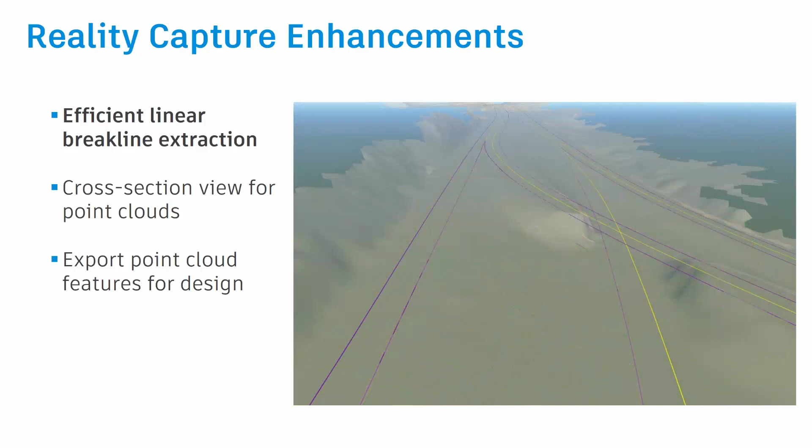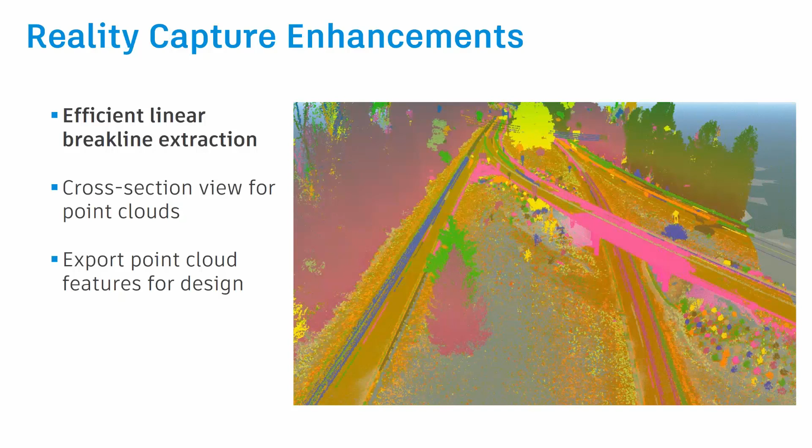Now the user can bring in point cloud data and extract linear strings, and the point cloud can be any type - static, mobile, or even high density airborne and drone data. You can bring in those point clouds and extract them. And when we talk about linear strings, design, and accuracy, we cannot skip the cross section or section view of the point cloud data, so we added those capabilities as well. And of course, once you create them, there has to be a better way to export or take it to Civil 3D to complete your design process, so we added that export option as well.

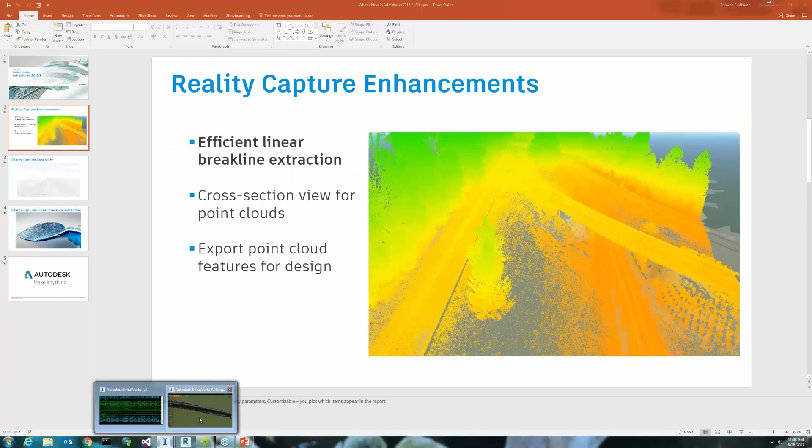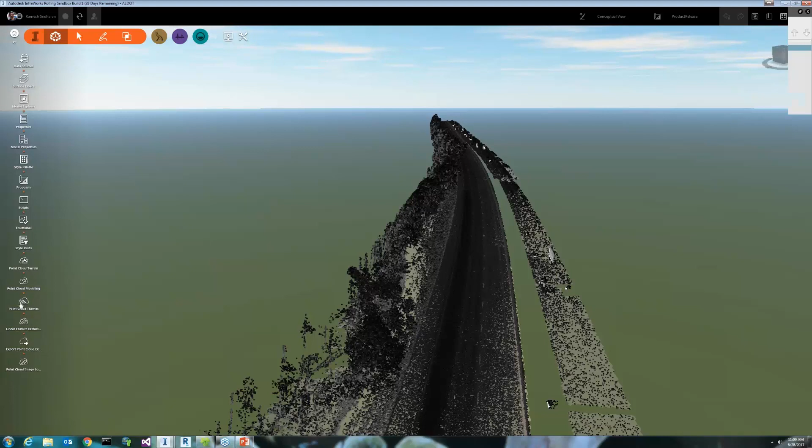Let me jump into the product real quick to show you the tools. This is typical mobile LiDAR data - not too dense, but dense enough to see the point cloud. I picked this specifically because some of the features are not that visible to the human eye, but the point cloud themes tool we already have does a good job bringing them out. If I just switch it on, you can actually see the paint stripes, the edge of pavement - everything was classified in this particular case and kept as very important features right there.

Now the extraction of linear features, we made it really simple. There's a button called linear feature extraction - you click that and there's two options. One is the good old manual stuff, click and double click to create a 3D polyline, but I want to show you the automatic. You click automatic and you have the ability to choose different line styles or what feature you're trying to extract. In this case, I'm going to extract, let's say, edge of pavement. Click edge of pavement, OK, and tell the software what you're trying to extract - in this case, this is the line I want to see.

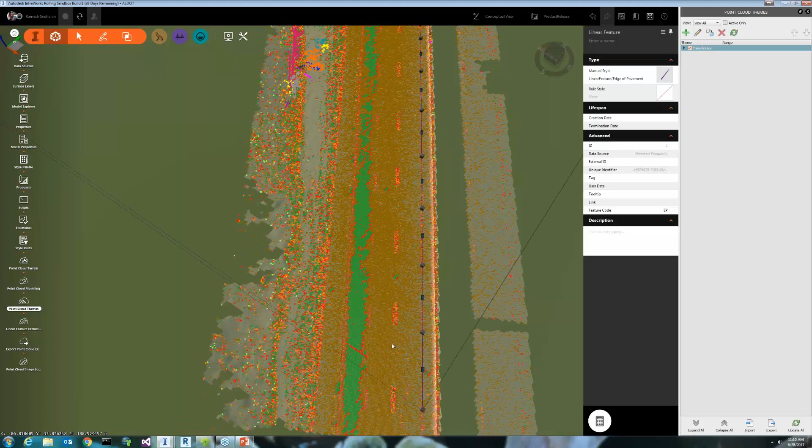The software just gets the information of the feature code in the form of line style right here, and also what line you're trying to extract. Then it completes your thought process - it basically parses the whole point cloud data and identifies all the points that matter for this line, and creates a 3D polyline. Before I zoom out and show you, let me create one more. Click linear features, same thing, automatic, and in this case I'm going to choose quick select - the paint stripe, and this and this. So basically it just gets basic information from the user, and then the software does the heavy lifting to get the 3D linear strings right here.

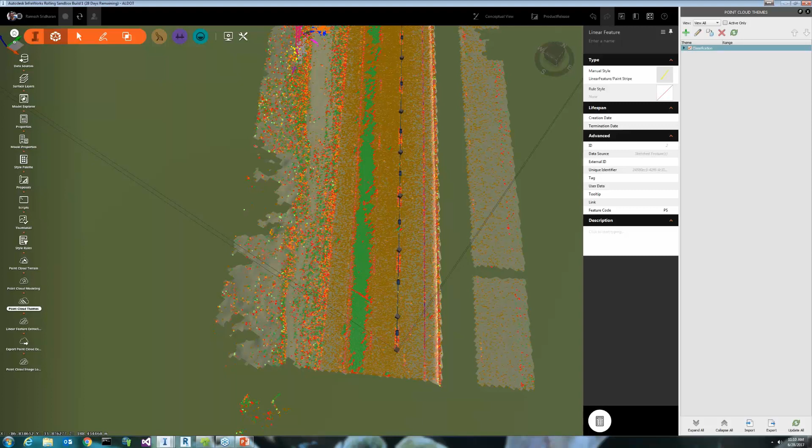The vertex clicks you're making - it's better to be as accurate as possible, but if you're a little bit off, you don't have to worry about it. The software does most of the job getting it good. Let me zoom out - you can see it's relatively big data. Let me zoom out even further. The software did a good job creating a 3D polyline. When I zoom in all the way on the other end, you can actually see this is the paint stripe, and this is the edge of pavement line we created as a 3D line. So the software makes extraction much easier.

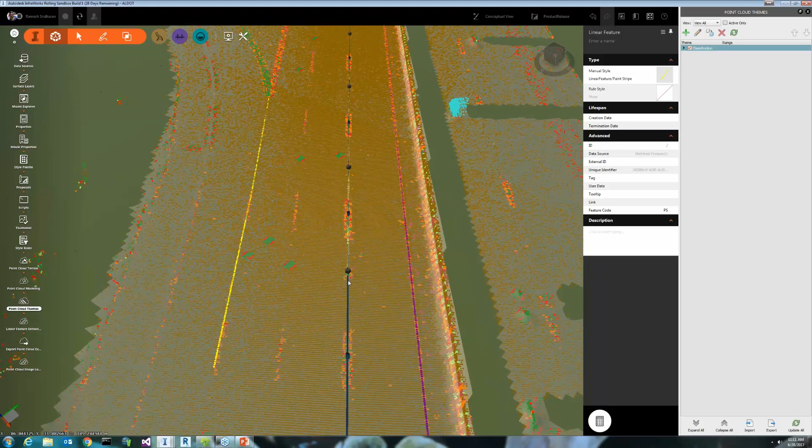Just to show you the manual part - very simple, you can just click, and with the usual double click you can now create the 3D polylines also. We also added some basic line editing functionalities, like for example, if this is the line and I want to split them, you can just click and split.

Now the software makes it two different lines, and you may change your decision and want to merge them. You can just bring it together, and now it makes it one solid line. So we added splitting, removing vertex, and adding a vertex, all those capabilities to make sure you can create a good 3D polyline from the point cloud data.

Once you have that, the user will want to check the lines extracted in the section view, but most importantly, extract the break lines. Let me dive in somewhere like the top and bottom of the curb. I'm going to select a line for an alignment, right click, and say show cross section view. Now the software jumps into the section view.

A lot of options available. You can exaggerate the section view any way you want. There are point cloud themes available to suit the user's need and how you want to see it. There are options for how much of a section you want it to jump, the thickness and the width to show, all that good stuff.

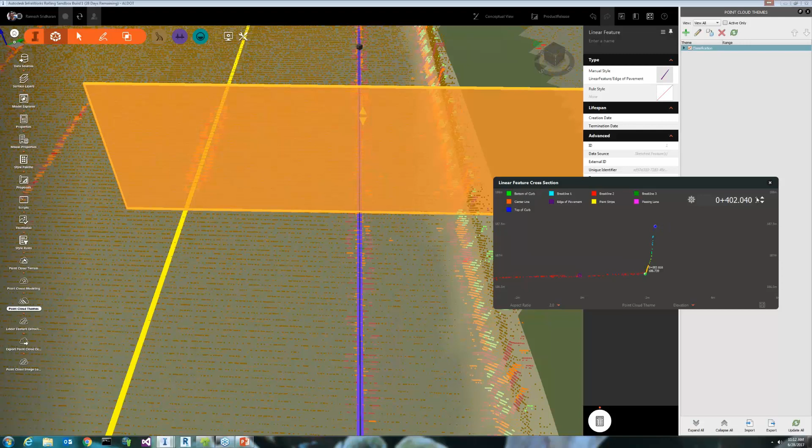So here, let's try to extract the top of the barrier and the bottom. Just click them, now you got the vertex. I go every 5 meters in this case, and now I can extract a 3D polyline of the top and bottom of the barrier. And it's real-time feedback.

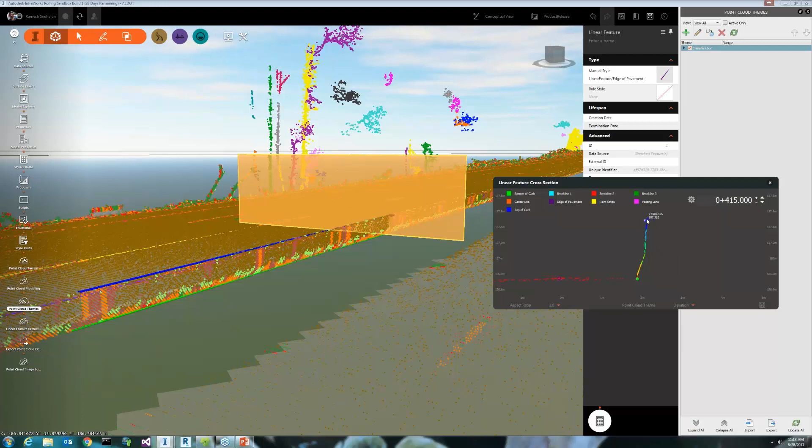You can see the canvas keeps moving and the line keeps updating, and updating the vertex is really simple. Just click and drag. You can mouse wheel zoom in to see exactly where you want to position it to make sure everything you extract is as accurate as possible. The software does a good job maintaining the view irrespective of how the point cloud might go up and down depending on the road elevation changes, easing the extraction process.

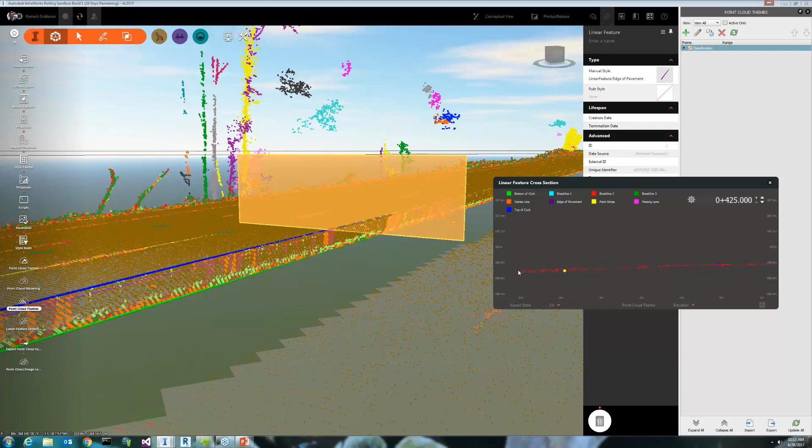Same thing when doing this, if you want to edit some other vertex, like this one here, just click and drag and the software creates the edited line polyline. So cross-section makes the QA/QC job of extracted line work automated, and also lets the user extract additional lines as needed, making sure accurate line extraction comes into the picture. This solves most of the user's problem.

Now you can extract the break lines, take it to Civil 3D, interpolate them, and create a 3D surface. There goes your very good 3D design with Civil 3D. You can get the job done.

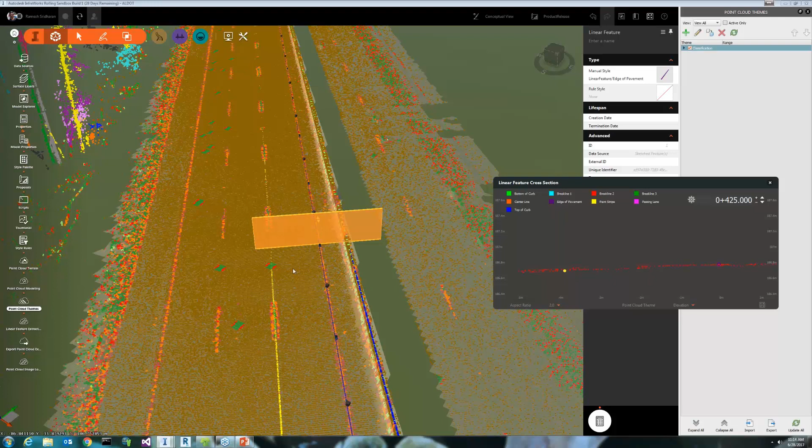We want to add a bit more functionality, like augmenting the break lines with additional details in case the user wants to. One way of doing that is we added a tool called transverse lines. For example, now we have just a break line. Imagine having a horizontal or perpendicular line every so often that gives you more surface details if you want to use. That's exactly what this does.

Let me close this. Come here, choose any alignment, and generate transverse line. There are simple but effective options available for how often you want it and how you want to drape it to the point cloud, all that stuff. But the bottom line is when you press OK, the software creates a transverse line as a 3D polyline for the whole corridor or alignment. That can be exported also, I'll come to that in a second.

So now you're not only extracting the break lines, you can augment that with more details like this. Let me switch off the point cloud so you can take a look at the transverse line. It's for the complete corridor, obviously, and that's one way of augmenting your surface.

The other way is we added the export option. When I click here, the first option is ground grid points only. For those who use the point cloud terrain functionality, which we've had in the product for quite some time, this classifies the point cloud data and extracts a bare earth terrain.

Now you can export them - you had the export option even before, but now I made it simpler, extracting the ground grid points as a separate entity. And of course the linear features, you can extract them with the feature codes and all the attributes available here, and the transverse line as a separate option, so users can choose to use it or not depending upon the purpose.

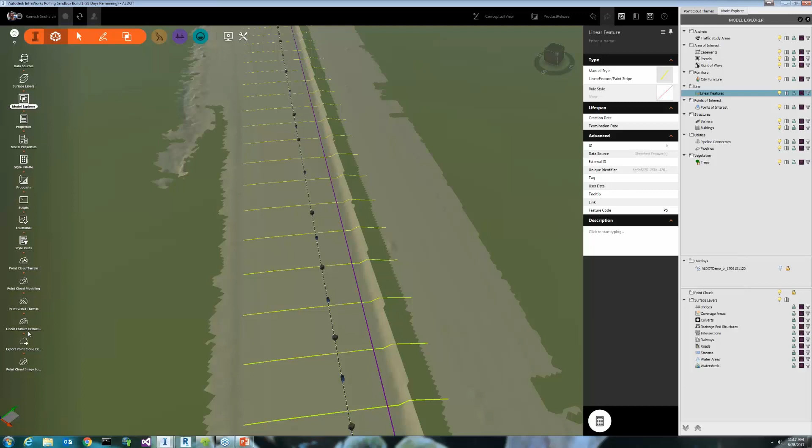Absolutely. So there are some automated options available. Let me just switch on the point cloud data. If I say automatic, you can choose top of curb or bottom of curb, because it's specifically designed to look for the top kind of feature and bottom kind of feature. But as always, you can go into the cross-section mode and extract top, back, and everything of the walls also. Very easy.

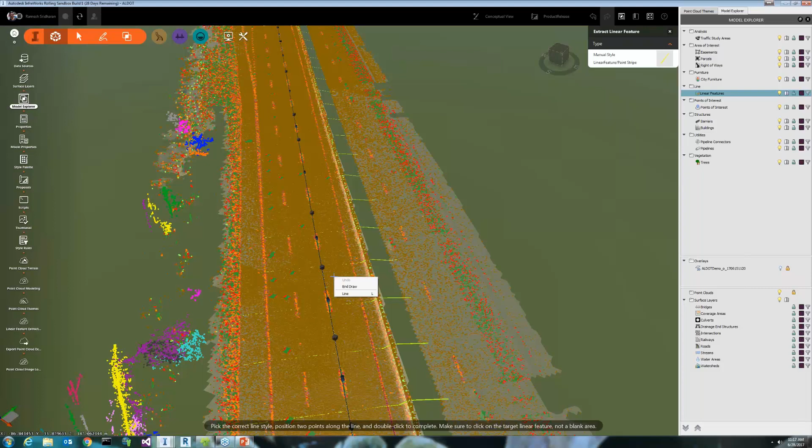Awesome. Another question that came in was just asking about the accuracy of the extracted features. Do you know the type of location accuracy for the features, and if there are any limiting factors?

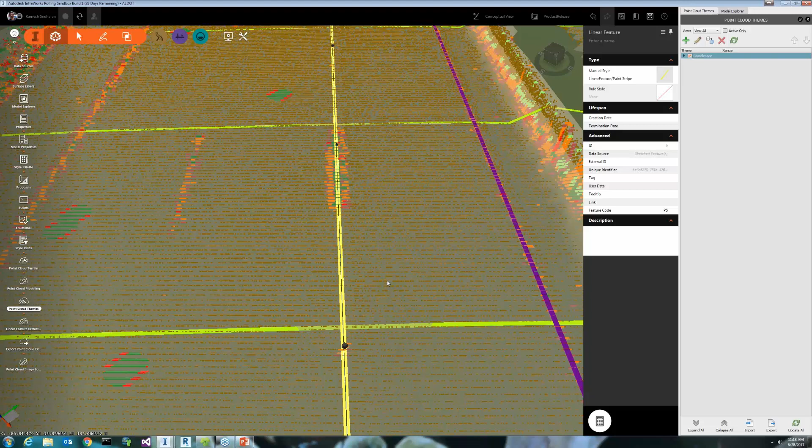Definitely. So the automated algorithm tries to put it exactly in the center. You can see here, I can change the different theme—there you go, not that bad. It's a little odd to see, but you can see that's a paint stripe where it's supposed to be, and the lines are put exactly in the center as much as the point cloud is available. So it makes sure the positional as well as the elevation accuracy is as close as possible. And when it comes to cross-section, it actually shows everything to the user, so the user can guide the vertex where it wants to be to make it more accurate. Either way, you will get accurate quality lines out of the product.

So another question: when you're working in the section editor for feature extraction, is there any type of automation for the bottom and top of the line work, or is this solely a manual process?

We do, actually. So we added some capabilities we call vertex prediction. We had some basic functionality where when you go from one section to another, the software tries to pick the best possible vertex for you. But we plan to make it better and better. It's automation where users don't have to edit so much in the cross-section view, but come across as just a QA/QC person to make sure it is accurate. So there is some automation going on in cross-section also.

Awesome. Okay, I'm going to ask you two more quick questions, and then we will move on to some other sections. One question is, will we get the option to bring in raw LAS files?

That is in the pipeline, actually. Right now we are using the RCS file that comes through Recap. We had some requests from users on opening the LAS file also. That's in our pipeline.

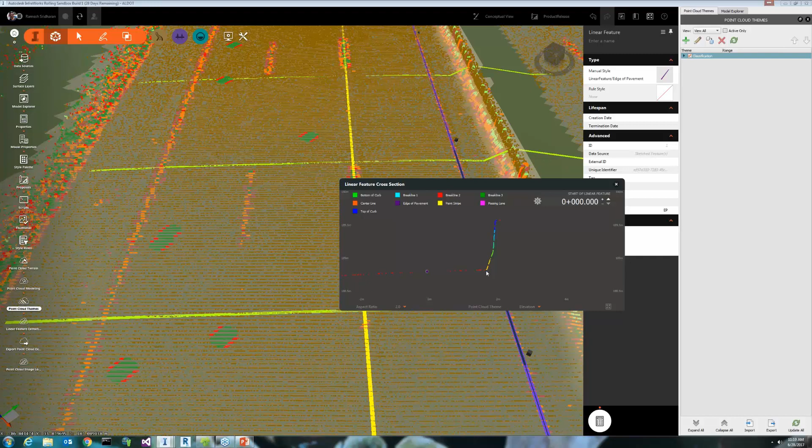Great. Okay, another good question: does break line generation depend on point cloud identification? Can it generate break lines if the point cloud has no identification? When you mean identification, I'm not sure if they mean the intensity values in the data or the classification. I can answer both.

You have to run terrain generation right now to use the linear feature, but terrain generation is an automated process, so you don't have to do much. When it comes to intensity markings, the automation does look for them, so it needs some information, especially for paint stripes and edges of pavement. But for the top and bottom of curbs on cross sections, it doesn't expect anything except XYZ values. So even without markings or indication, you can still use the cross-section viewer to extract what you want.

Okay, final question, to clarify about a previous question on accuracy. Are there any limitations to importing point clouds covering a large area? And does every point come in at the exact location it was collected?

Yes, it will. As far as the point cloud is concerned, we open through an RCS file, and everything will come exactly where it is. This extraction result assumes the point cloud is registered with the control points and things like that—we don't register it ourselves. So every line you're extracting will be as accurate as your point cloud data.

Awesome, great. Thanks Ramesh, we got through all those questions.

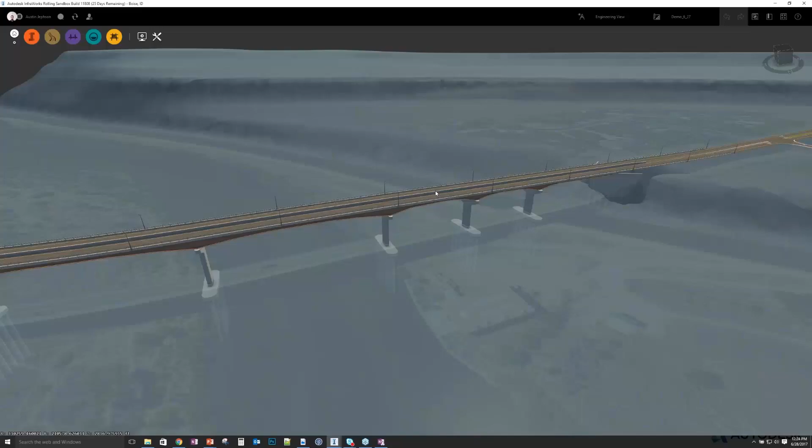Without further ado, I'll go ahead and show you everything in InfraWorks. So here I've got my InfraWorks model—hopefully the lag isn't too bad, but I'll try to move a little slow. First we'll take a look at the 3D dimensions. If I zoom out a little bit and select this bridge, you can see off the bat that you've got an annotation for the start and end stations, as well as one dimension showing the overall length of the bridge.

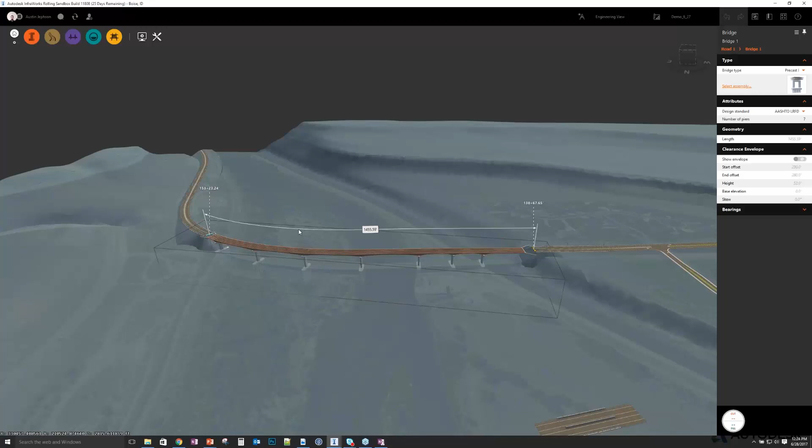If I zoom in, you'll start to see other dimensions appear. With the bridge selected, we show the overall length, start and end station, and then the distance between each pier, so each of the span lengths. This is measured from the center point of the pier to the center point of the adjacent piers.

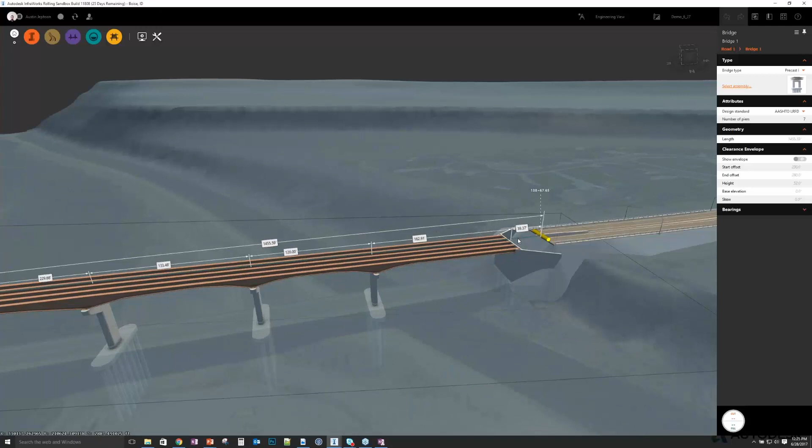In this example, I've got the abutment offset a little bit from the end of the bridge, so you've got another dimension that shows that abutment offset. Now, so that's with the bridge selected. As you select the other objects of your bridge, all of the different components, you'll see a different set of dimensions that are being shown.

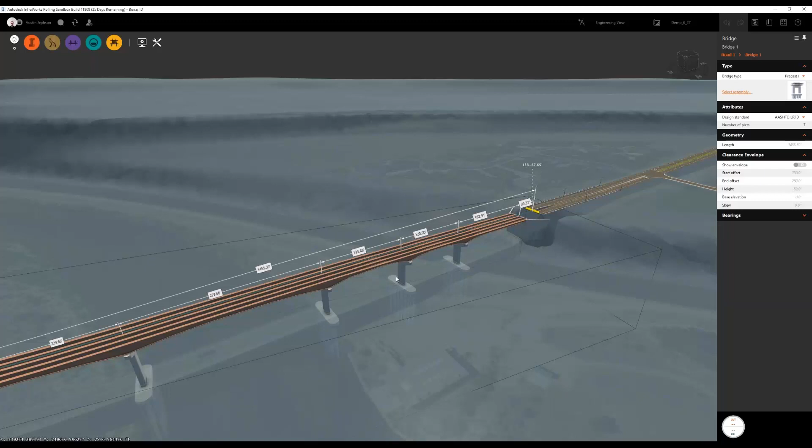Looks good, okay great. So as you select other objects, you'll see a different set of those layout dimensions. Here I'll click on the pier, and you can see that when the pier is selected, you see the pier height as well as the distance to the next pier, distance to the previous pier, and the distance to the start and end station of the bridge.

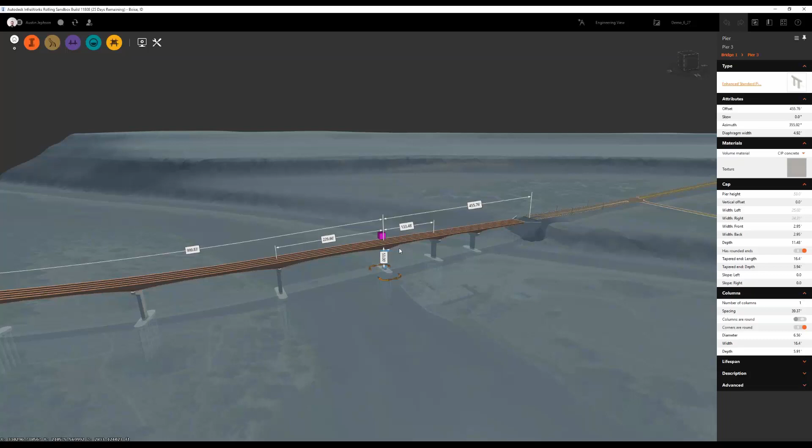Then if I zoom in a little bit and select a girder group, here you can just see for girder group we only show the length of the girder group at the center point of the alignment. Most of the other dimensions are more girder specific.

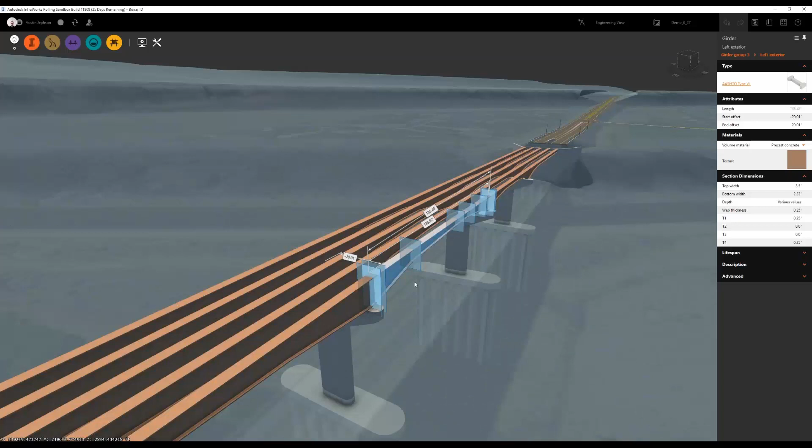So then I'll select a single girder, and here you can see a couple more dimensions. First, from top view, we have distance to the center point of the alignment. Then from side view there's a couple others: one dimension that is the overall length of the girder from start to end, and then another that shows you the distance between the bearings, the center point of the bearings.

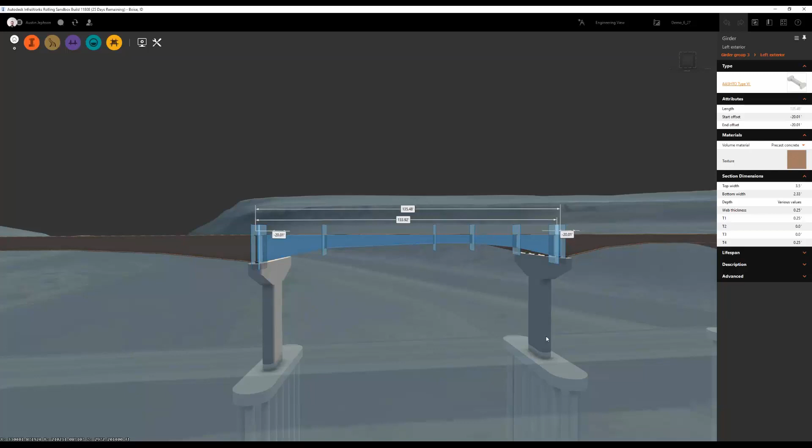In this case, on the left side there's only one bearing, so it's reaching all the way to the end of the girder. On the right side, it's not a continuous girder, so there's two bearings, and you can see the difference in those dimensions.

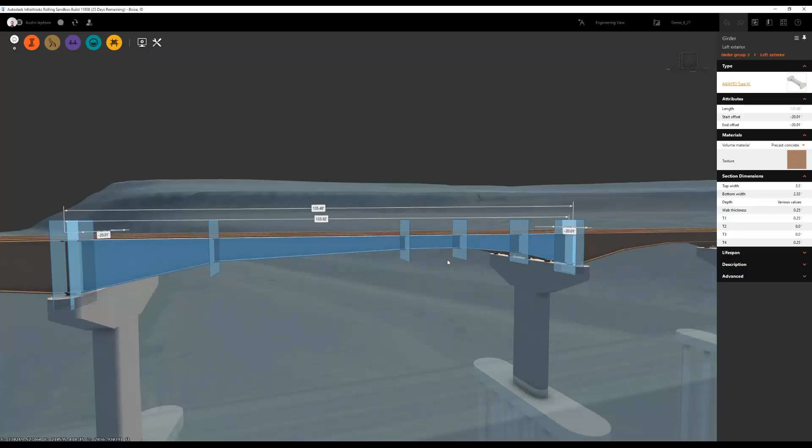So I'll go one more level, and then we can discuss a couple more things. I'm just going to use this example. If I select one of the cross-section slices, the girders on this bridge are variable depth steel girders. I'm using AASHTO type 6 girders for this, and I've changed the section dimensions so that it looks like an I-beam girder and has the right dimensions. Then I've changed the volume, material, and texture so it shows up in my material calculations as steel.

Then to create the variable depth, I've placed a series of cross-sections along the girder and adjusted the parametric attributes of it. Now when I click on one of those sections, you can see there's now these in-canvas dimensions in addition to the mini toolbar. So this is kind of hinting at the next stage for these in-canvas dimensions.

The mini toolbar allows you to change all of these values, all these placement dimensions, and add in new ones and delete them and so on. But eventually, and there's another team working on this, kind of creating the widgets and all those things, you'll be able to just interact with these dimensions directly. So you click on this 40 and change it to 50, and you'll see that cross-section slice update to match. That's kind of the next stage for making all of these in-canvas 3D dimensions interactive, and that'll open a lot of doors for how you interact with your InfraWorks models.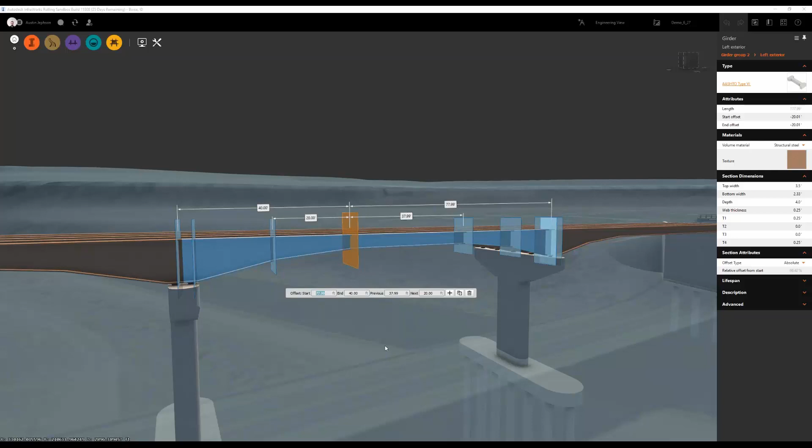So I think that's it for the 3D dimensions. We'll continue to expand the way that we use them over time and add in more. And so now let's take a quick look at the decorations. Here I just created this little snippet of road just to make it easier for us to look at.

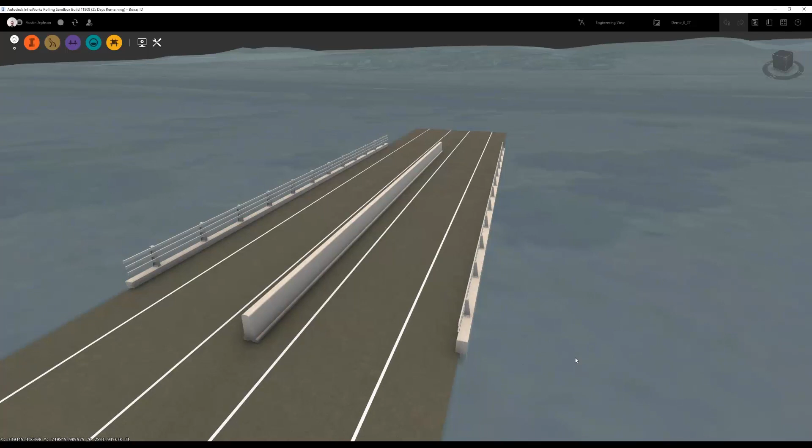You can see I've got some decoration along it. On the left side, I've got this little parapet concrete piece. This is actually an assembly from that bridge we were just looking at. I just created an assembly and then applied it to this road. So these parapets kind of extend below the ground.

On the left side, you've got a box beam guardrail with 3 rails, and on the right side, you've got a box beam guardrail with only 2. You can see this parapet on the right side is a little taller than the one on the left, and then we've got this barrier in the middle. So these are all the new parametric

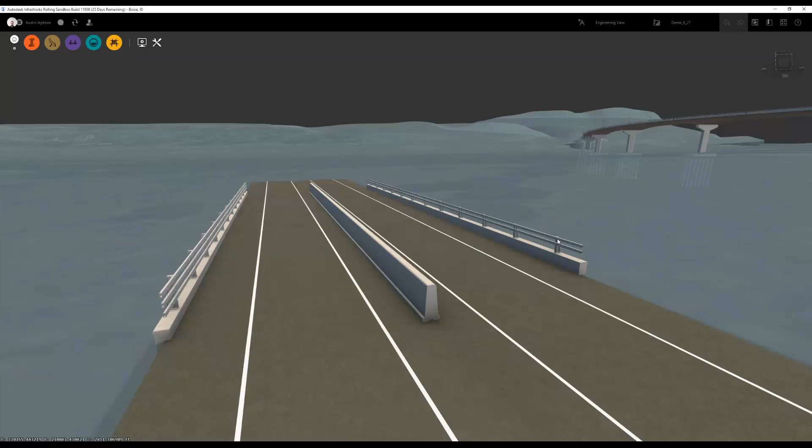decorations that we've added, and both of these guardrails are actually the same Inventor model. So if I select it, I can see that in addition to the normal things you would see with decorations, so this geometry section, you've also got a rail, post, and plate panel, which are all of the parametric dimensions that you can actually flex in the model, and these are all defined by that Inventor model.

So I'm just going to make some quick edits so that we can look at it. I'll just make this have 3 rails. I'm going to change the spacing to 6 inches between each of those rails. Then I'll change the thickness so it's a little bit wider. I'll make it 6 inches as well. And then I'll change the height of this post to, say, 3.2. And then I hit enter.

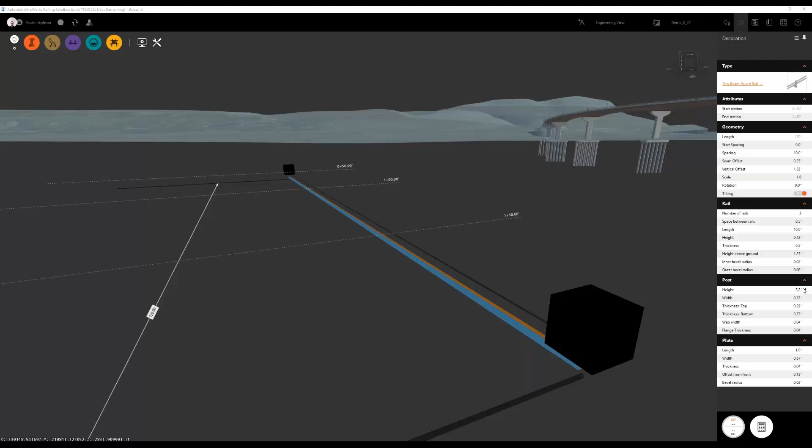So you can see also that this has a delayed update mechanism like all of our bridge objects. So you edit multiple values, hit enter, and it changes. Now, I didn't do the best job with those edits, but you can see that I can really create a wide variety of different configurations using this one parametric model.

So just because it'll drive me crazy if I don't, I'm going to change this space to add a little more space in between there. So that's looking a little better. You can see that it's kind of starting to match this one that I have on the other side.

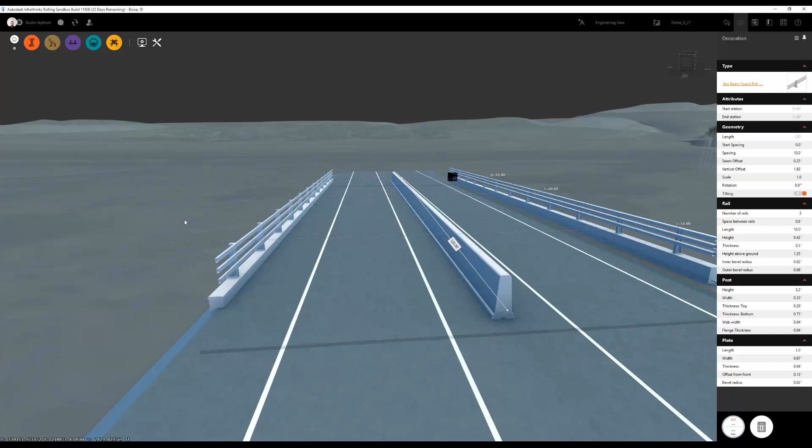And if I look in Style Palette, so these parametric decorations are added to the Parametric Models tab. All of your 3D models and typical decorations are going to be inside the 3D Models tab, and that's where your static models are that are created in 3ds Max or Maya, exported as FBXs, brought into InfraWorks. So the Parametric Models tab contains all of those parametric models.

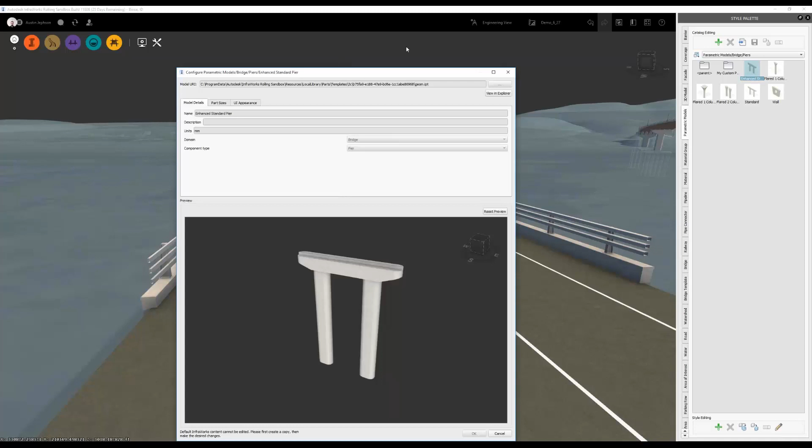Like we previously had only this bridge folder that contains all of our bridge objects. So if I look in here, I can drill down to piers, and I can select the enhanced standard pier, and I can see it in here. It's got all of the part sizes. There's only one, but you can add more, and then my UI appearance tab.

So we essentially just are using the same area for all of our parametric decorations. And really, this folder structure doesn't matter at all. This is how we are suggesting it and how we want to ship the content that we ship with InfraWorks. But you could create a new folder here, and you could name it after your project, or you can name it after the region that it's in, or really however you want to organize it is up to you.

The way that you'll look at it, so if I go into decorations, and I'll just open that box beam guardrail, we have the same exact window, same exact workflow. So the way that you define this as a decoration is using this initial page. You assign the Inventor model, and then you'll just set this to city furniture and decoration, and then it'll be recognized by all of your roads and then you can use it.

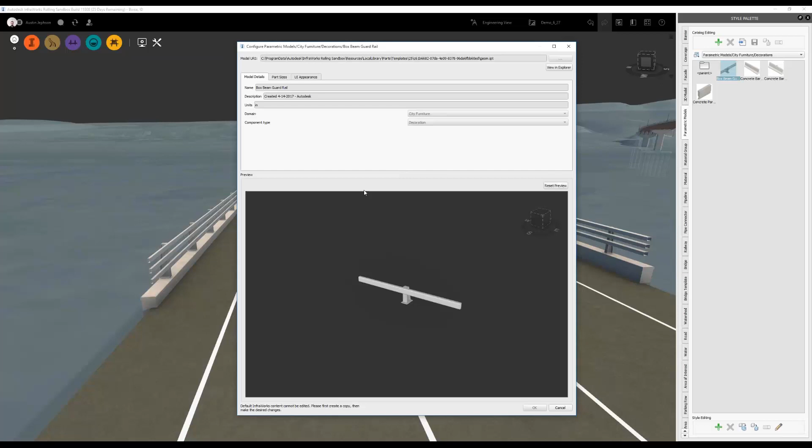So if I look at this one, I've got a couple part sizes. I'll just click through them real quick. So we've got one that has 1 beam. This one has 2 beams, and that's the one that was in the model behind it. And then this one has 3 beams, and that's the one that's on this left side. So these 3 different parts are available in your catalog. When you say add a decoration or place a decoration, you'll be able to see those 3 different guardrails. And I can add more, I can delete them.

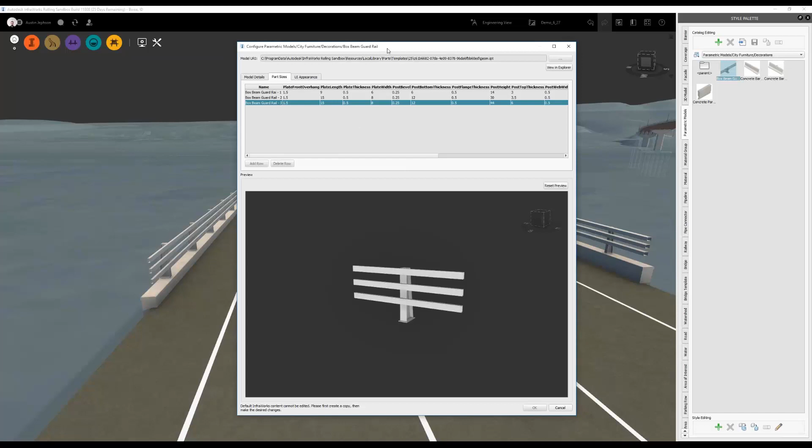If you bring in your own custom Inventor parts, you can do it in the same way. So if you wanted to create a streetlight structure, you could create an Inventor model, however complex, assign certain parameters to be exposed by InfraWorks, bring it in here, and then create different part sizes, like maybe one that has 2 lights for 2 lanes, and one that has 3 lights to align with 3 lanes. Different things like that.

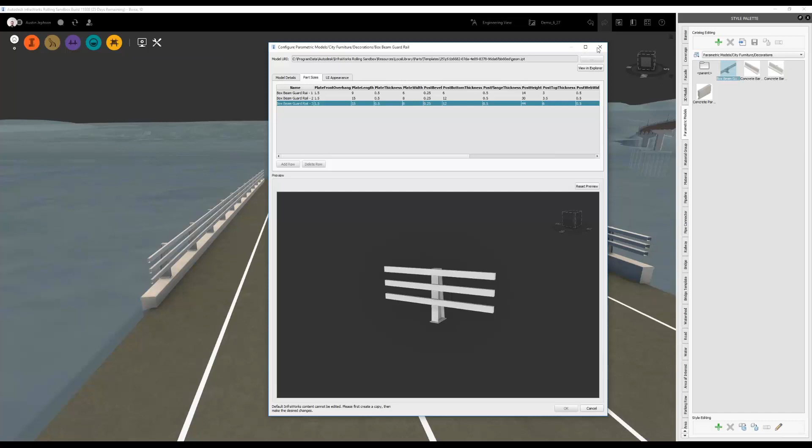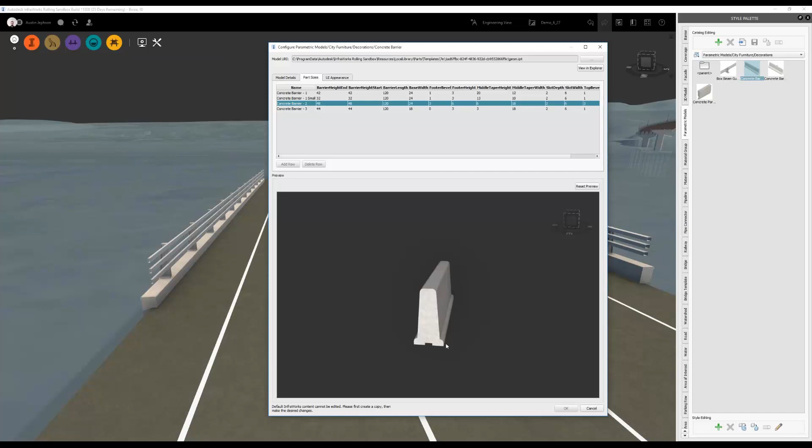Quickly to wrap this up, I'll click through a couple of these other parts. We also added this barrier that's fully flexible. This version is based on the New Hampshire DOT spec, but I've also created a couple of different variations that just have a different visual style. Using that same part, I'm able to make these adjustments and create a drastically different barrier. Here's the other one that's just got a slight taper to it, but pretty boxy.

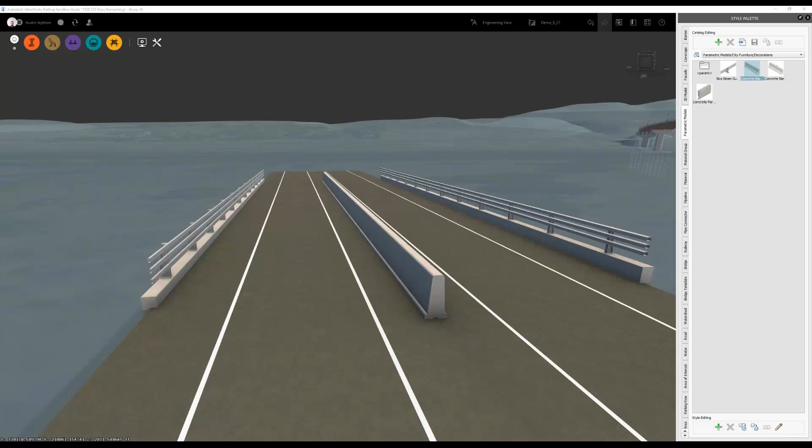Hey Austin, can I ask a couple of questions before you get into the next piece of what you're going to present? There's quite a few in the question pane, but I'll pick out a couple that I think might be interesting. One of them is from Tim, and he asks about Fusion 360 and whether or not Fusion 360 could be used for generating these parts.

That's a good question. We're really interested in Fusion 360, and we think it'll make a lot of sense to use that. There's some technical stuff going on here. So Inventor - we actually install Inventor Server with InfraWorks, so we're able to run a headless version of Inventor. So when you make all these changes, it's actually like Inventor is calculating some of these things, and then we're projecting it into InfraWorks. Right now, I believe Fusion doesn't have that headless version yet. So once we have that, I think then we can unlock it. But at the moment, I don't think that'll be happening in the near future.

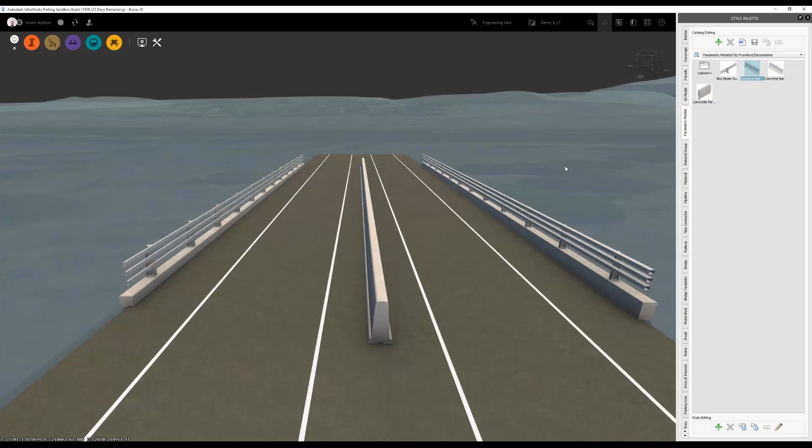Okay, a couple of other questions. One of them was about the 3D dimensions, and whether or not there were plans to extend or expand the dimensions that are shown, maybe to show the distance between different levels of the bridge, like from the top and bottom of the abutment or girder.

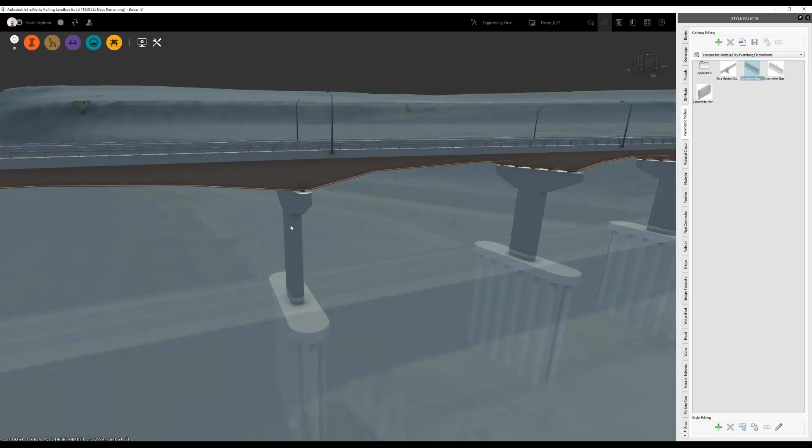It's definitely in the plans. We're working through all of those things and figuring out how we can show them and get those dimensions. But we do have some stuff coming up to make some improvements to dimensions, as well as the parametric content workflows, which I'll talk a little bit about. But yes, there are plans to improve the dimensions.

Another thing that we're looking at and exploring is - if we use this pier as an example, this pier in Inventor is created using a series of sketches, and each of those sketches has a bunch of dimensions associated with it that are projected and displayed and laid out in Inventor. We flag those annotations and say we want to show them in the stack here. But I think we're looking at how we could actually grab those sketches and sketch dimensions and display those in 3D space as well. So that's just an idea that we're exploring, but I would expect this to evolve over time.

Okay, is there a way to lock the dimensions to a specific axis?

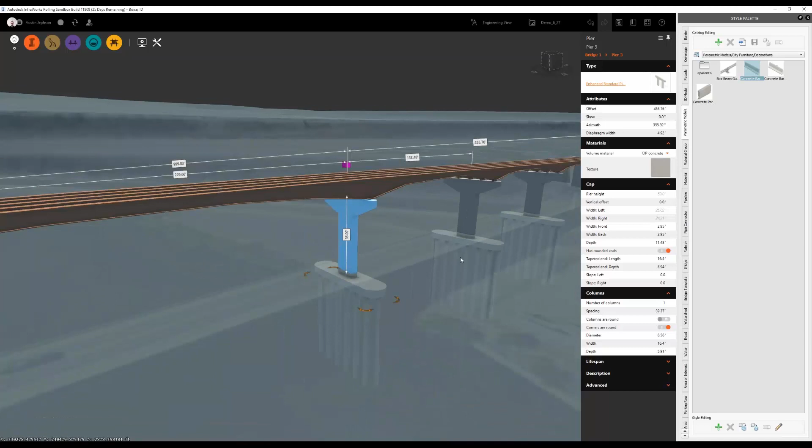Is that locking the existing dimensions that you see here? I suppose so - I think so, because I'm looking at when the question was asked in the panel, and I think it was around that time. So the dimensions themselves are locked to a vertical axis right here. So if I go to the top view, then they're not moving around or anything. So they are positioned along that vertical axis.

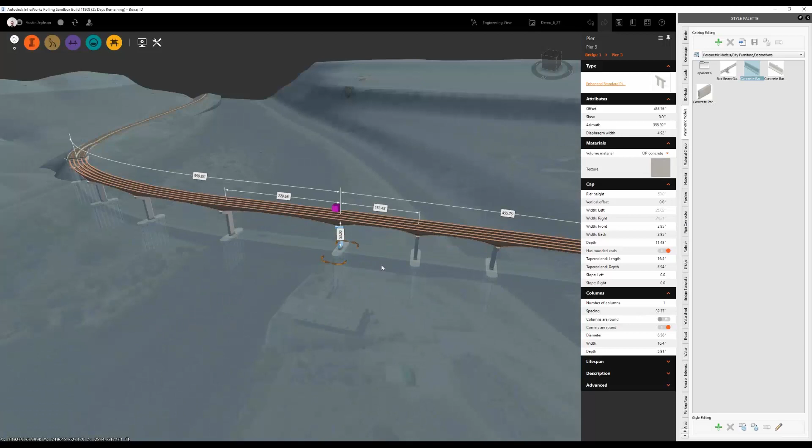Okay, there might - I think there are some other ones, like if we look at the girder, then you do have some horizontal dimensions, and we're picking and choosing how we think it would be best to display these. But there might at some point be an option to change it. Not right now, though.

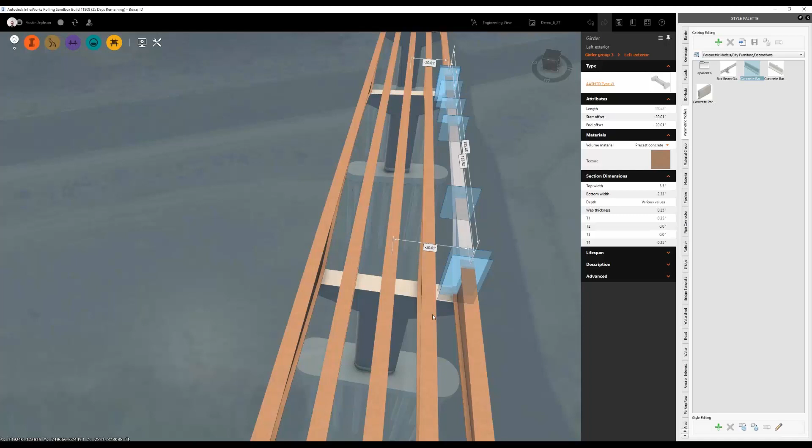Okay, one last question. It's about the content that ships with InfraWorks when moving from bridge dimensions to the 3D parametric models. You showed a couple of barriers that ship. There was a question about whether there was a side barrier, or a barrier that understood whether it was supposed to be on the left or right side of the road.

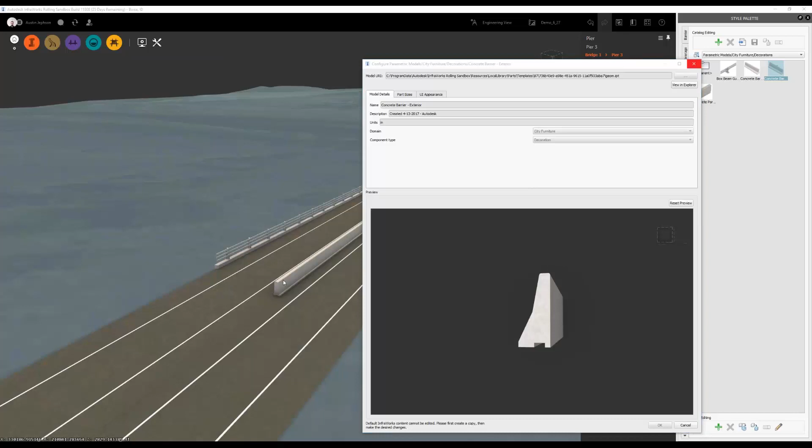It doesn't have any logic, but there is a concrete barrier that is one of the edge exterior barriers. Right now, you would just place it on whichever side you want and then rotate it around. So if it was placed on the wrong side of the road or in the wrong direction, you could rotate it, the same way that you would rotate any of your decorations.

So here's an example of that, actually. This is the same sort of parapet that I've just rotated 180 degrees to match that side of the road.

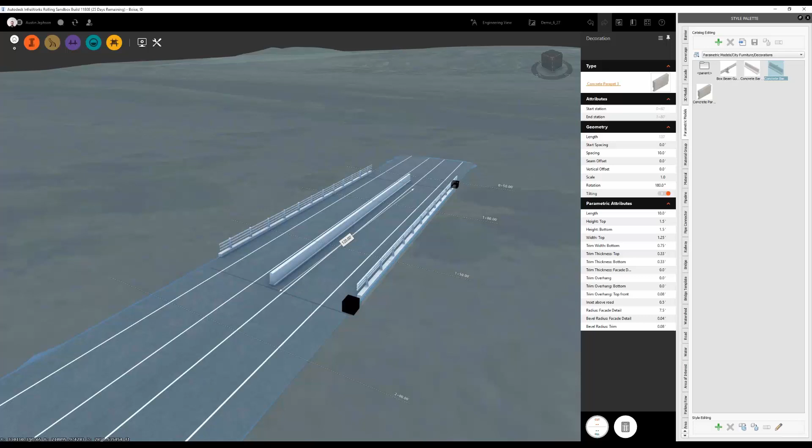Perfect. I actually have two. There's a lot of questions, and they're all actually really good ones. Do you know if there are plans to be able to export a barrier like this, or the 3D models,

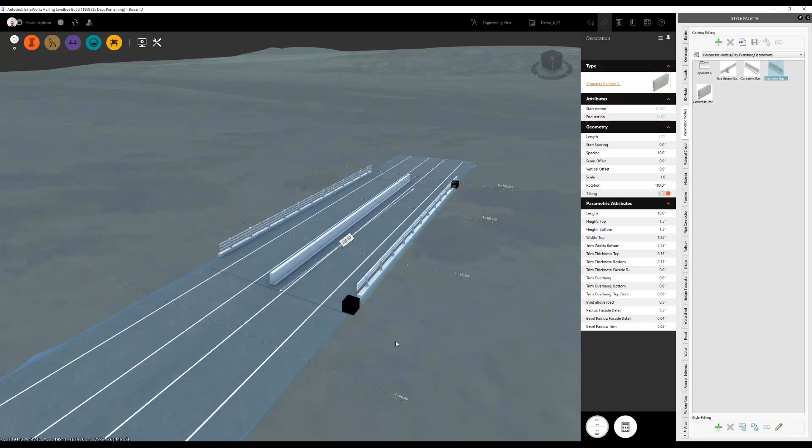from InfraWorks to Revit, similar to the workflow for bridges today? Yes, so I guess it's kind of a two-parter. Right now, if you use Send to Revit on a bridge, so just in case anyone isn't familiar, if you click on a bridge and have it selected, you can right-click and say Send to Revit, and that will generate a Revit model for that bridge that matches that bridge exactly.

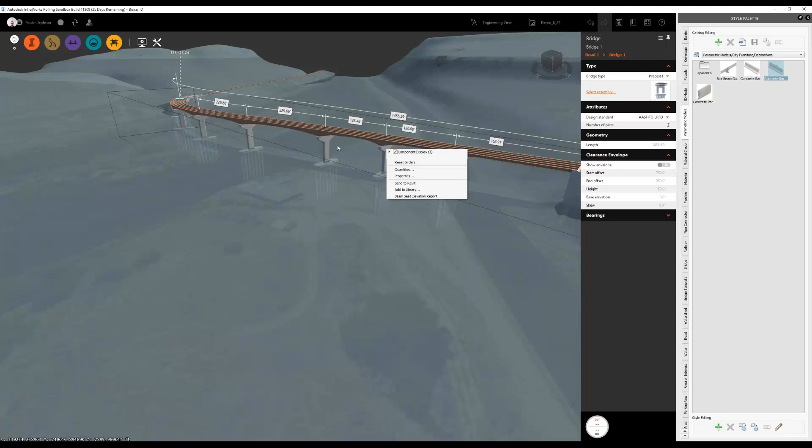So right now, if you have decorations on that bridge, they'll also be exported to Revit, and you'll be able to add rebar and all those things in Revit. Right now, it only exports what's on the bridge, so there is no option to just take this road and say export to Revit or send to Revit. But that's something that we can look into.

And coming up next, one of the things we're working on next on the bridge team is making improvements to the whole Revit workflow. There's been a lot of work on the Revit side of things, so we're kind of moving on to phase 2 of Revit interoperability for InfraWorks. I'll talk a little more about that after this as well.

Perfect. I'll let you continue with the next piece of your presentation, but there are still quite a few questions in the Q&A panel, so hopefully you'll be able to stick around and address some of them. Yeah, sure, I can stick around afterwards and I'll start typing in some answers after this. Also feel free to email me at any time, I imagine most of you have or can find my email address.

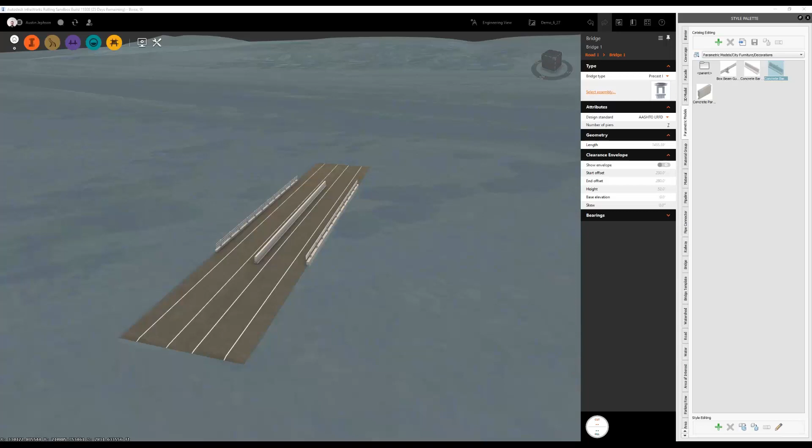So we talked about the 2018.1 release. If I go to the next slide, we have a couple of things coming up. Like I mentioned, the Send to Revit Phase 2 is probably one of the biggest initiatives, and this is going to be a very impactful initiative as well.

Right now, like I said, you use Send to Revit and it creates a Revit model, but that Revit model isn't necessarily linked to your InfraWorks model. So if you make a change, which often needs to happen, you might create your Revit model, get started on rebar detailing, and then the alignment shifts a little bit, or you find you need to move a pier by 1 meter - there's all sorts of things that could require a small change to that model.

So right now, you would have to recreate it essentially because it's not linked. So phase 2 of Send to Revit will introduce the ability to update an existing Revit model based on changes in InfraWorks. So if I create that Revit model, spend 3 months doing rebar detailing, and then need to move that pier, I could go back into InfraWorks, move the pier, update the Revit model, and it'll preserve as much as possible of that rebar detailing and previous work. I think that'll be the next major thing for Revit.

We're also working on displaying the dynamic properties of your InfraWorks model objects in Revit, so that you would have all those dynamic parameters and things like that.

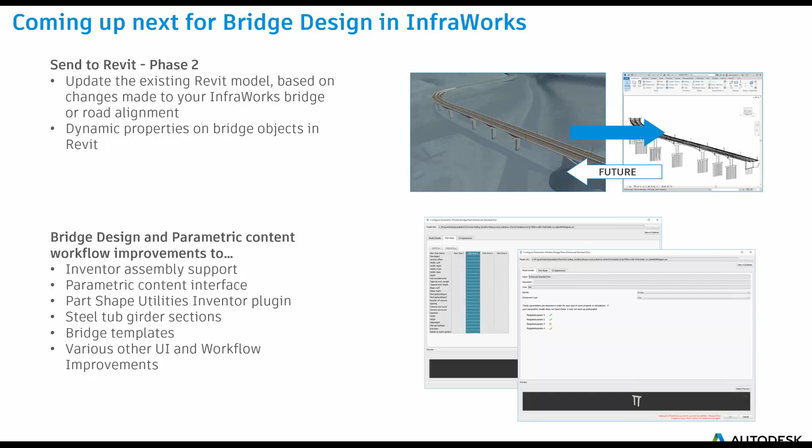Okay, perfect, thank you. So hi everyone, I'm Sarah Cunningham, I'm part of the product management team for InfraWorks. First, I wanted to say thank you to both Ramesh and Austin for joining today to talk about the functionality related to reality capture and linear feature extraction, as well as bridge design and 3D parametric models. They've both had so much input and say in the direction of how those features develop and their implementation that they're really the best people to present those features, because they're so close to them.

But there are a number of other people on the product management team who aren't here today, and I'm here to talk about a lot of the features they worked on that are also in the latest release of InfraWorks.

So the first thing I want to talk about builds on what Austin was presenting in terms of 3D parametric models, using Inventor to create them and then being able to bring them into an InfraWorks environment.

Related to that is something we have called the Infrastructure Parts Editor. What this allows you to do is support drainage design workflows, not just in InfraWorks but also in Civil 3D. This screenshot shows how it's accessed within InfraWorks, and it lets you create custom content you'd use for drainage design—inlets, manholes, and so on. What's nice is that exactly the same content you create for InfraWorks can also be used in Civil 3D, so in theory you create content once and can use either product.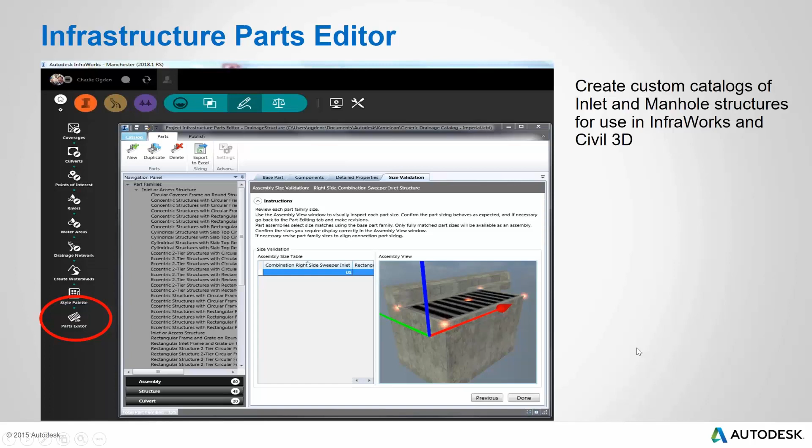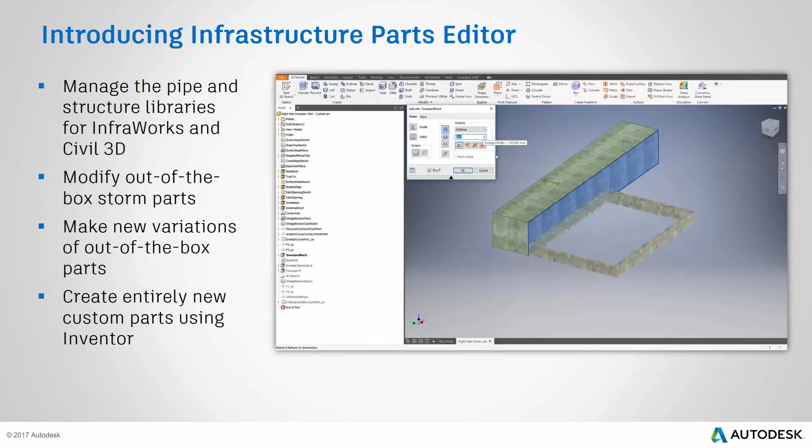This is a quick video showing a bit about how it works. In this case, it's an inlet in an InfraWorks model, and the video shows what that inlet looks like in the parts editor when you launch it from the InfraWorks environment. It also shows a number of other structures created with this parts editor in Inventor. You can make them as complicated or as simple as you want, add whatever dimensions you need, and bring them into your InfraWorks model. There are a number of components pre-configured that will ship with the software, but that's just to give you a sense of what the tool can do and a place to start if you've never done it before.

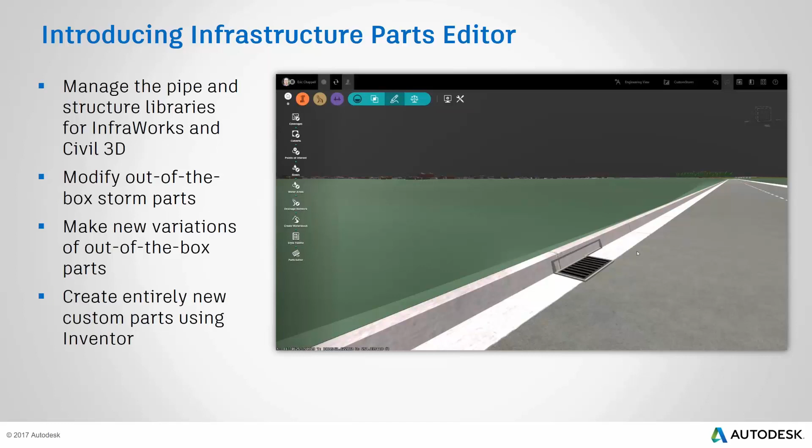You'll see that same Infrastructure Parts Editor both in an upcoming release or update to Civil 3D, as well as the pending release of InfraWorks, so it'll be in both tools.

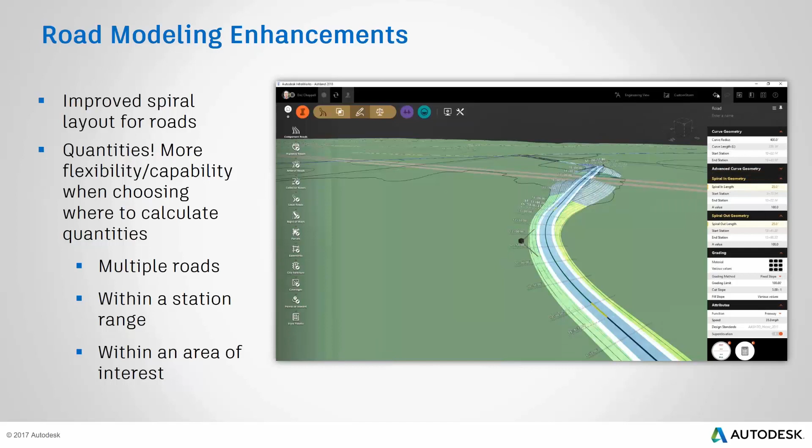When we talk about updates to InfraWorks, I often put them into two categories, or four categories. I usually talk about the design and engineering experience, which is what you're seeing here, and I talk about modeling, like the idea of creating new drainage parts or the kinds of functionality that Ramesh and Austin talked about.

We also talk about things related to the platform, so things that we do to improve the foundation of InfraWorks as a building information modeling tool or an engineering design tool. And we talk about connected workflows, supporting workflows that allow data to go back and forth between products.

Most of the highlights for this update relate to the design and engineering experience as well as modeling. This video shows some of the road modeling enhancements, and there are really two. One is around experience improvements for laying out spiral curves on roads. They've made changes that allow you to edit that geometry on the roadway center line in Canvas by dragging grips around.

The other thing they've done is made it clearer and easier to edit the different dimensions of the spiral coming into and out of the curve, along with warnings that let you know if your edits violate the road standards currently being used.

The second update to road modeling relates to quantities. We talked a lot about quantities in the April release, really about two things: earthwork quantities for a single road and material quantities for a single road. You could select a single road and see the earthwork, calculated by average end area, or see the material quantities for most of the components.

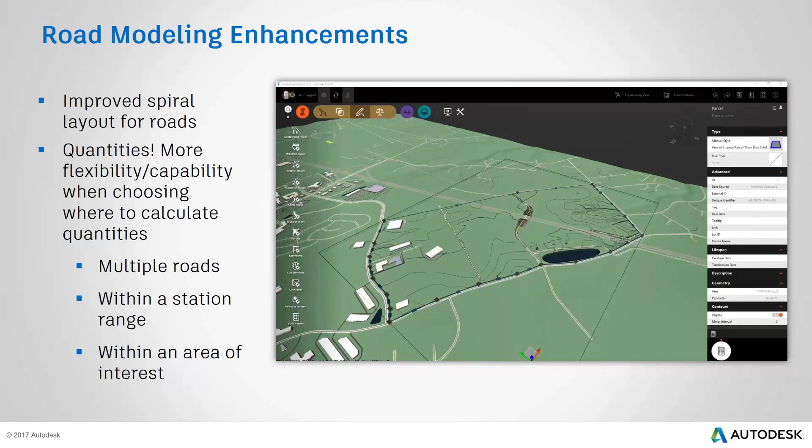We've made a couple of other enhancements categorized as things related to the design and engineering experience. One of them Austin already talked about: the 3D dimensions on bridges that appear when you've selected the bridge components.

A second thing we've added are prefixes to some of the roadway station labels to clarify what the labels are. For example, you'll see a prefix of BC for beginning of curve or EC for end of curve at the beginning and end of a circular curve on a roadway alignment. You'll also see key points along a spiral, like where the tangent begins and ends, where the spiral curve begins and ends, with those prefixes too, so they stand out and are distinct from the station labels shown every 50 or 100 meters.

So a couple of little things to make the data clearer when something is selected. In addition, we've added a broader control that lets you determine whether or not you actually see those dimension lines, whether it's on a bridge or a road or anything else, when they're selected.

One of the things we released a couple releases back was view settings. You could have this view setting, and have as many as you wanted in a model, with the ability to set parameters for those view settings, like how saturated the model is, how it represents trees, and so forth. The idea is that you might have a different view with a lot of detail for the design phase, but a view that looks a lot different if you're using it for presentation purposes.

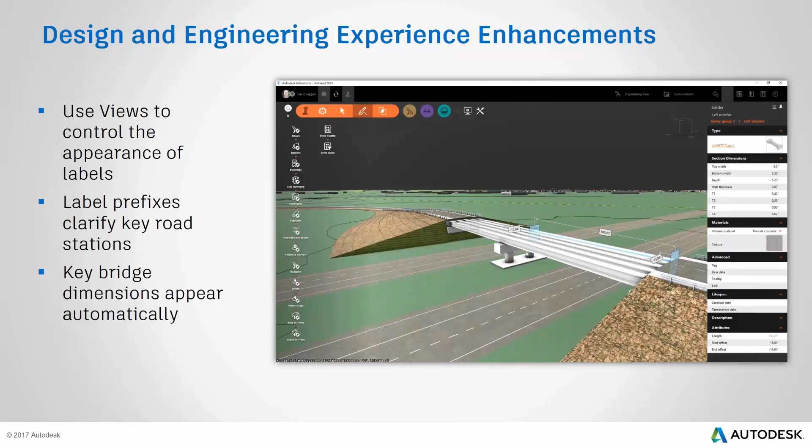Most importantly, I'll wrap up by talking a little more about what's next. Austin addressed some of that, talking about updating the send to Revit functionality along with some other stuff. And the development teams here are really focused on looking at a few things.

One of them will be around refining the linear feature extraction workflows that Ramesh talked about today. That will be under refinement for a while. There's also some work going on around additional road modeling capabilities.

A lot of the feedback we've gotten from customers like you so far is that what InfraWorks has is good, but it needs more detail, or needs to be able to accommodate more detail. So we're looking at a number of initiatives related to the platform, the foundation of InfraWorks to support that, as well as things that would change the way or give you more flexibility in the roadway modeling tools to design something more complex, say roads with sublayers, more complex horizontal geometry, or more complex relationships between things like lanes and baselines, and so on.

Lane markings is something that's also on the team's roadmap. I bring that up because lane markings tends to come up a lot, so I want people to know that it's something the teams are looking at.

We're also looking at improving the connected workflows, and one of the things we're looking at is how to store an InfraWorks model in something like the BIM 360 environment. For those of you that maybe aren't as familiar with BIM 360, I'm trying to think of the best way to describe it. It's an environment where you can put all of your project data - Word documents, PDFs, images, notes, meeting minutes, Revit models, InfraWorks models, AutoCAD drawings, a whole bunch of stuff.

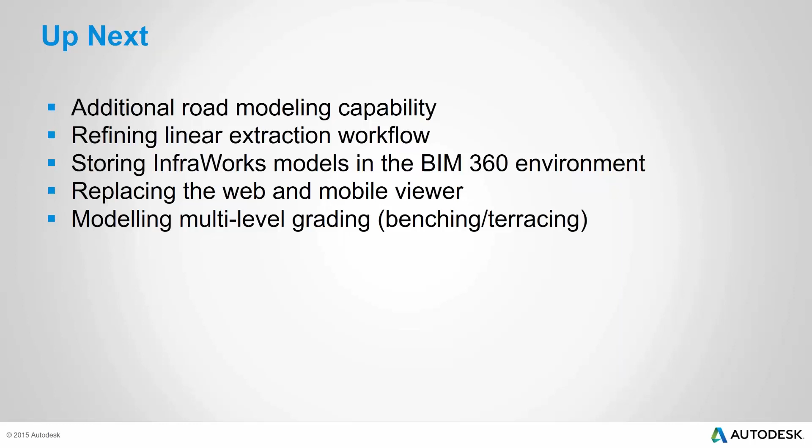And that wraps up the quick overview that I wanted to give you on some of the other remaining features. I think we can wrap up today's webcast.